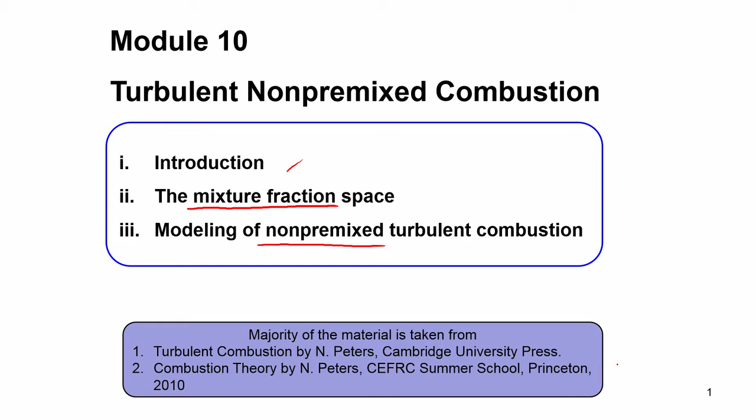The majority of the material in this course is taken from two sources: mainly the Turbulent Combustion book by Norbert Peters, published by Cambridge University Press, and the combustion theory lectures by Norbert Peters from the CEFRC, Combustion Energy Frontier Research Center, Summer School, Princeton. These lectures were developed in 2010, and I believe they are available online free of cost on the CEFRC website. These are the references we will follow for turbulent non-premixed combustion, and in the next module, turbulent premixed combustion. So in this module we will focus on turbulent non-premixed combustion.

Now why will we study that? This course is on combustion in air-breathing aero engines, and the gas turbine engine and ramjet engines are two very important parts. Most aero gas turbine engines historically have utilized turbulent non-premixed combustion.

So this is the gas turbine combustor. The flow enters from left to right through the compressor guide vanes, passes through a diffuser section where the pressure is slightly recovered, and then passes to this set of swirlers. When we go into the discussion about gas turbine combustors, the details of these combustors and this architecture will become more clear. But essentially here you will see that the fuel is injected in a liquid sheet through this central injector, and then this liquid evaporates.

Then this liquid sheet essentially breaks up, and large droplets are formed, and then these large droplets break up into small droplets, and then the small droplets evaporate, and these droplets are essentially of jet fuel. So essentially this liquid evaporates, and it forms a nearby cloud of this fuel mixture, which then mixes with the air, and sometimes at the point at which it mixes with the air, the mixing is not very efficient, and the flame that you have is a non-premixed flame.

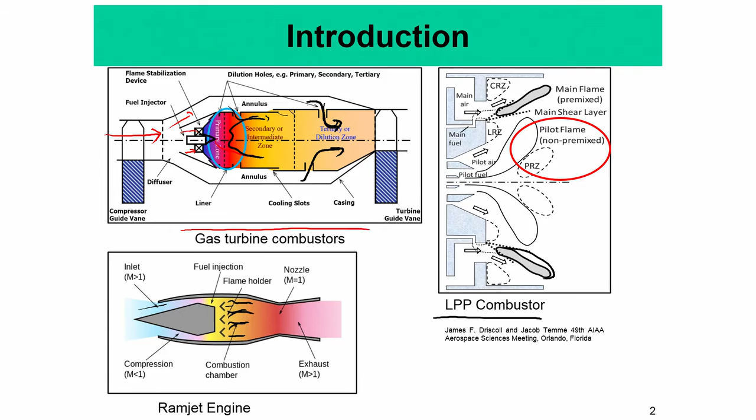And so non-premixed flames have been very prevalent in all these aero gas turbine engines, and even in scramjet engines the flame is to a large degree non-premixed, though there are premixed segments also. So one thing you must understand is that in actual gas turbine engines, though the flames can be predominantly non-premixed, there are regions which are premixed or partially premixed also. Okay.

So it's a mix of these two, but combustion modeling historically has progressed in a way that it models non-premixed flames and premixed flames separately because of their distinct properties. So to understand how to model a flame in a combustor which is predominantly non-premixed, we will go into this detailed analysis in this course and see what are the approaches by which non-premixed flames in these types of combustors can be modeled.

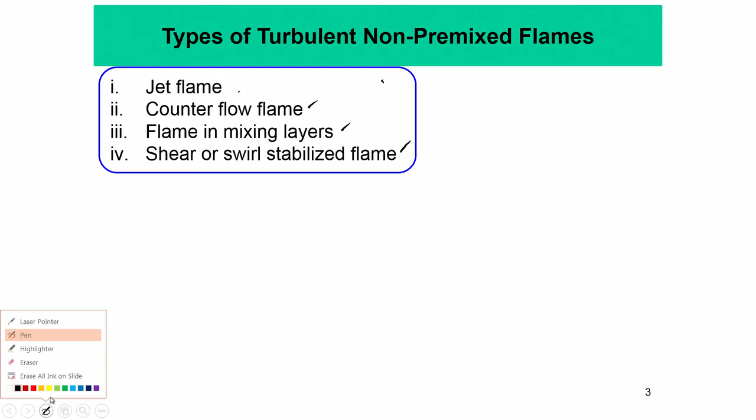Okay. So of course, to make models you cannot directly go to a gas turbine combustor. So what people have done is detailed measurements in these kinds of simple non-premixed flames, which can be a jet flame, counterflow flame, flames in mixing layers, and shear or swirl stabilized flames. Okay. So these are the typical flames people have studied in the laboratory.

So the idea is that you develop detailed diagnostics using different kinds of optical methods. People have done detailed measurements of the flow, temperature, species, etc. of these different kinds of flames, and then they have validated different modeling approaches against the experimental data. Then the idea is that these tools developed for modeling the simple flames, once they are robust and rigorous and we have sufficient confidence in them, can be utilized towards modeling the actual non-premixed flames in a real gas turbine engine, ramjet engine or scramjet engine. So that is the approach.

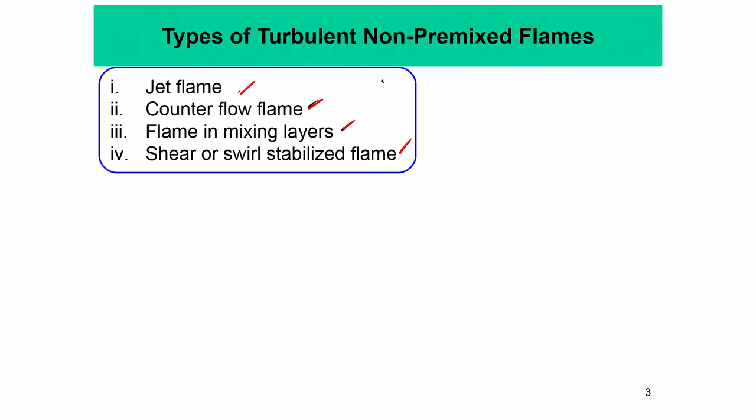Okay. So people have really done these kinds of flames in their lab. You will see examples of counterflow flames, jet flames, and flames in mixing layers. These pictures come from the turbulent non-premixed flame workshops, where people have done simple jet flames, piloted jet flames, bluff body jet flames, and swirl stabilized flames, done detailed measurements in them, and then used them for validating different numerical simulations.

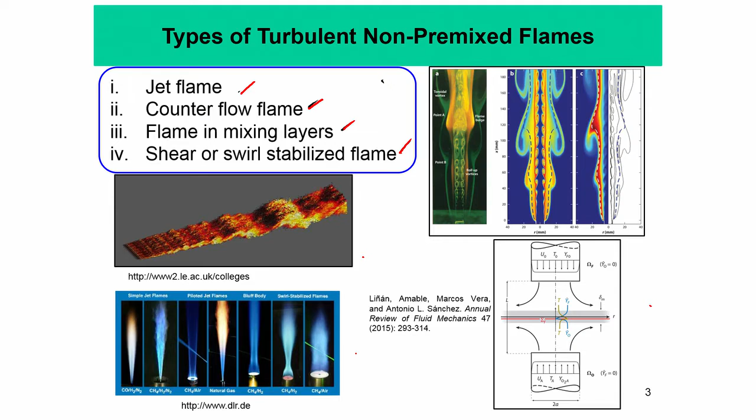Okay. So from here on we proceed to turbulent non-premixed flame modeling. First we will introduce the mixture fraction concept, or mixture fraction space, in a laminar non-premixed flame. So we will go back a little bit and apply these mixture fraction ideas to the 1D non-premixed flame that we discussed. We will see how the mixture fraction concept can be applied in those simple configurations, and then see how the mixture fraction helps a lot when modeling turbulent non-premixed flames.

Okay, so why does the mixture fraction come in? In non-premixed flames, there is a very basic underlying idea: the chemical reactions are much faster compared to other rates. Therefore diffusion, both of heat and of species, is the rate determining process. It is the rate controlling process, and the rate of diffusion governs how much your combustion rate will be.

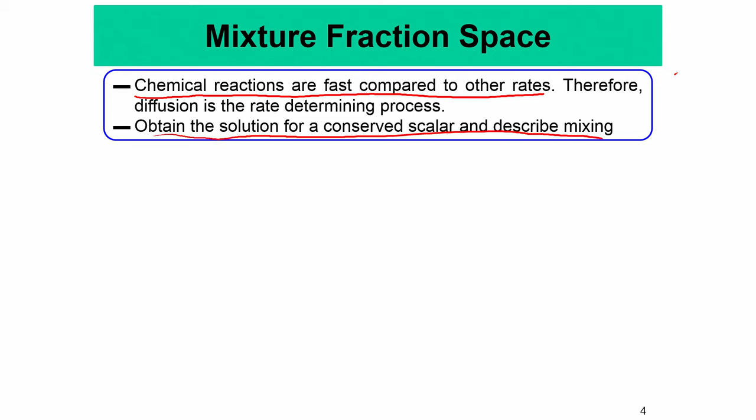So the idea is that we need to find a suitable conserved scalar. As you remember, a conserved scalar is one which does not have a source or sink term. So first we need to define a conserved scalar and obtain a solution for it, so that we can use it for describing the mixing, which is the rate determining process.

Okay, so that is the idea. So in search of that conserved scalar, we go on to define this mixture fraction. So, what is this mixture fraction? The mixture fraction is defined in this manner, that if you have a two feed system. What is a two feed system?

Suppose you essentially have a nozzle like this. At the center of the nozzle, this is an axisymmetric nozzle, you have a fuel, and on the sides you have another annular nozzle, annular cylinder through which air is coming out. So, that is a two feed system. The two feed system means basically you have one feed line of fuel, we have one feed line of air, and of course, this fuel and air are not mixing.

So, then the mixture fraction definition is that in such a two feed system, the local ratio of mass flux originating from fuel feed to the sum of both fuel and oxidizer feed mass fluxes is defined as a mixture fraction. So, you see that it is the local ratio of mass flux originating from the fuel feed to the sum of both the fuel and oxidizer mass fluxes.

So, suppose the fuel mass flux is M1, we will use a subscript 1 for the fuel feed, and we will use a subscript 2 for the air feed. So, the mass flux from the fuel feed line is M1 and the mass flux from the oxidizer line is M2. This need not be pure fuel, it can contain inert also. So, this is a fuel feed where you have to have a well defined mass fraction for the fuel, it need not be always 1.

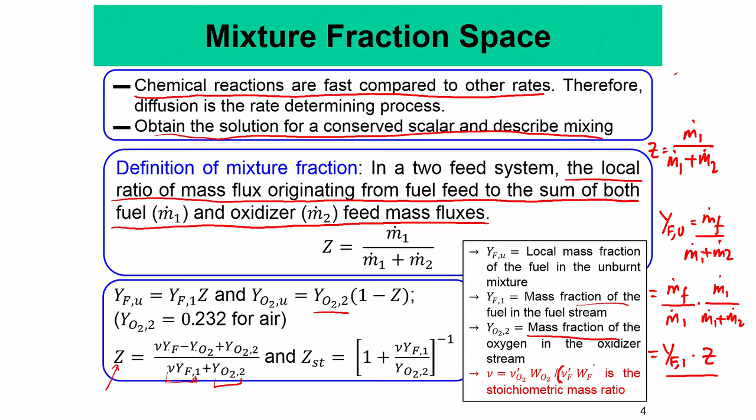You saw this previously also; it is essentially nu O2 dash times W O2, the stoichiometric coefficient of oxygen times the molecular weight of oxygen, divided by the stoichiometric coefficient of fuel times the molecular weight of fuel. So, how are these defined? nu F dash times fuel plus nu O2 dash times O2 goes to nu P double dash product. So, these are the stoichiometric coefficients. Please keep this in mind. So, nu is essentially the stoichiometric mass ratio.

So, the actual definition of Z is this, but at any point inside the combustor Z can be obtained from this. If you know YF and YO2, you can know this, but then this is not very useful; it is just an algebraic combination of YF and YO2. What we essentially want to do is find an equation for Z and then find YF and YO2 in terms of Z. That becomes very useful.

So, if you remember the Burke-Schumann flame solution, this is a very generic solution; it can be called the equilibrium solution also. On one side you have fuel oozing out and on the other side oxidizer, and if you project the solutions in mixture fraction space, then if there is no flame, if you do not ignite, the solution you get is essentially straight lines, because it turns out to be a linear differential equation, partial or ODE depending on whether you have time or not. If it is steady, it will be an ordinary differential equation as we have seen before. And for a burning mixture you will of course have product formation.

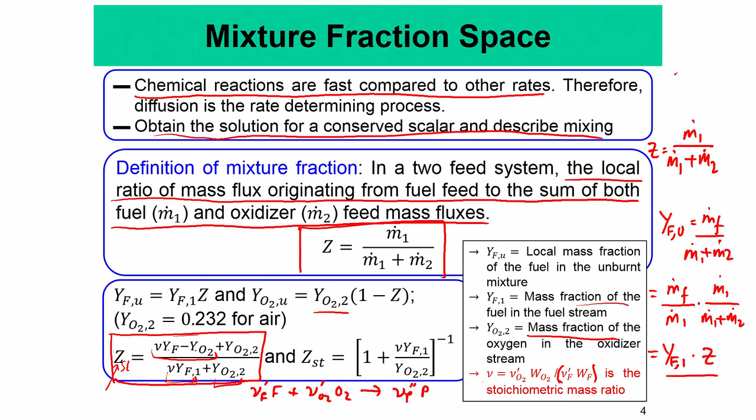So, what is the stoichiometric mixture fraction value? It is the mixture fraction you get if you put the stoichiometric numbers here. So, for ZST, these two essentially go out, and we will be left with this, so ZST is essentially equal to this. So, this is what you get, and you can basically have these kinds of simple laminar solutions in terms of Z also. Just take a look and solve this. I will not go into this again because we already did the solution of the 1D chambered flame.

So, this is just one more step where you convert those solutions into the mixture fraction space. Okay. But this is important because the solutions give you an idea that, using this mixture fraction, you can essentially go from the physical space in terms of X to the mixture fraction space, which is in terms of Z.

So, if all flames essentially obeyed this, then life would have been simple. You have essentially analytical results for this 1D chambered flame, and you could write all flames in terms of this. But of course that is not true, because you will see why this temperature can deviate from the adiabatic flame temperature, and of course this is the T adiabatic flame temperature for the given mixture.

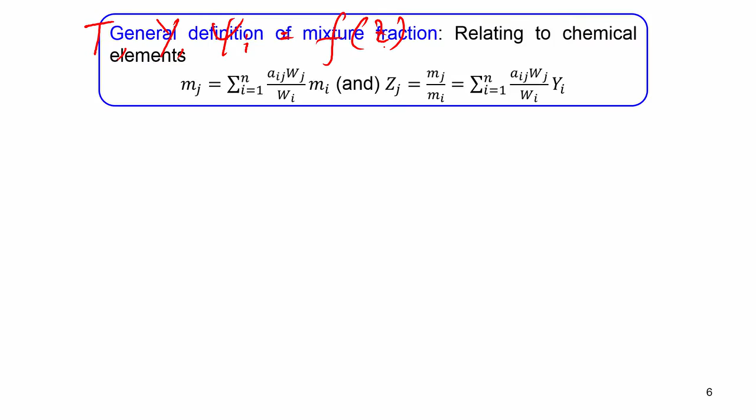Okay. So, now we have established that the mixture fraction is a very important concept, and you can essentially write the temperature, or species, or any reactive species as a function of Z. This gives you the idea that it is possible when you have these solutions in terms of the mixture fraction space, and that mixture fraction is a conserved scalar.

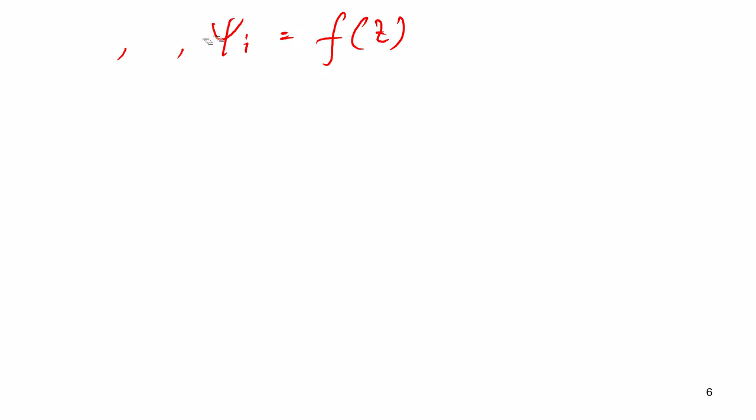So then the idea is, let's do some modeling in terms of Z, and the first thing is to find out how Z, this mixture fraction, is transported in a turbulent flow. So for that we need to develop these Favre averaged equations for Z and the transport equations of Z, and then we will try to use these solutions to project the temperature etc.

along the mixture fraction, and use these solutions to define local flamelets at different points in the flow in terms of the mean Z and the variance of Z. So that is what we will try to do. Okay. So the idea is that

from these pictures of the 1D flame, we find that the mixture fraction is very revealing; it essentially acts like an independent variable in the framework of this 1D chambered flame. So you can write things like Y, mass fraction, temperature, etc. in terms of the mixture fraction. Those can be expressed as a function of the mixture fraction. Now of course,

if you are told that at a point which is burning, you have a mixture fraction of this value, then you know the temperature at that point is the adiabatic flame temperature. So this gives you a map of these different reactive scalars as a function of the mixture fraction value. So first we have to know, in a given combustor at a particular point in space, what is my mixture fraction value.

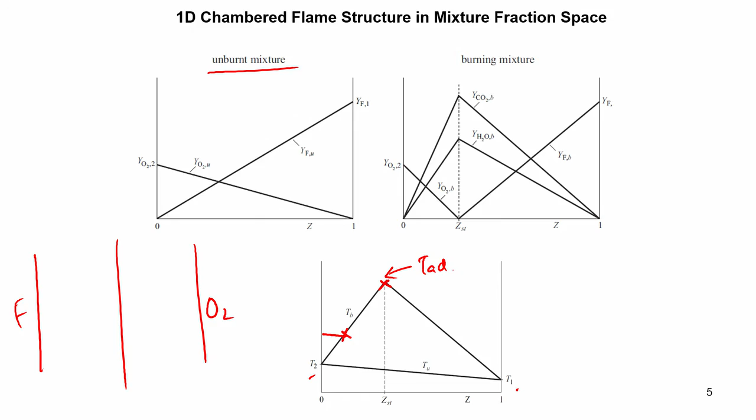Of course we are not interested in the instantaneous value of mixture fraction, rather the average value, and for that we need to find a transport equation that gives us the average value of the mixture fraction and its variance at a particular point in the flow. So we need to first define a governing equation that tells us how the mixture fraction is transported.